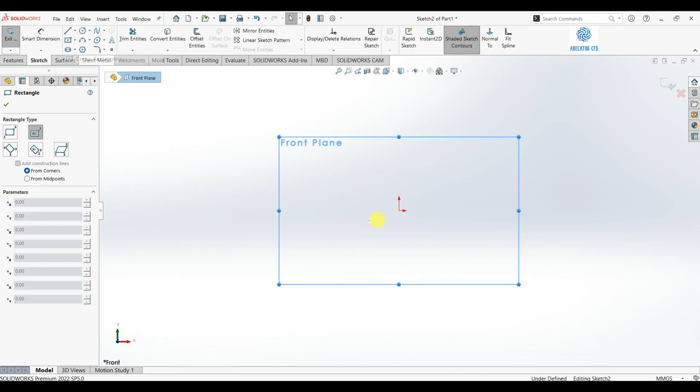In Extruded Boss/Base and many other features, you will find the thin feature option. Let's sketch a quick shape so you can see how it works.

When you enable thin feature, SolidWorks creates a hollow body with wall thickness. Right now the ends are open, so there are no caps on either side.

Here you set the wall thickness, then click OK. Now you get a hollow shape like this.

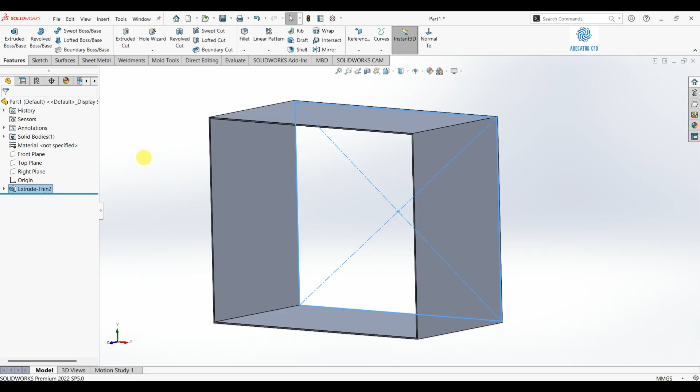And you can adjust the thickness anytime, for example, to 3 millimeters. If you enable cap ends, SolidWorks closes both ends with caps.

Here you can control the cap thickness too. Click OK.

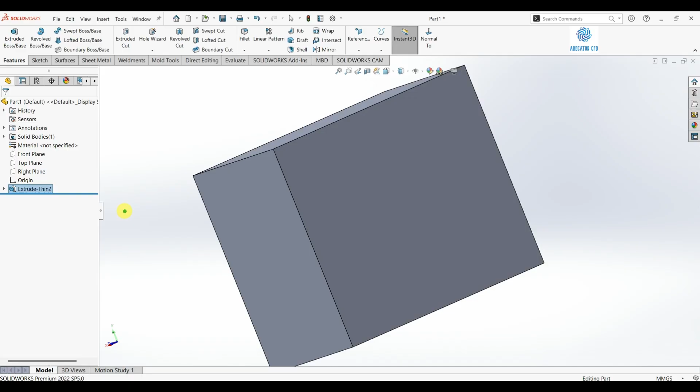Now the ends are closed, but the body is still hollow inside. Let's take a section view. You can clearly see the hollow interior.

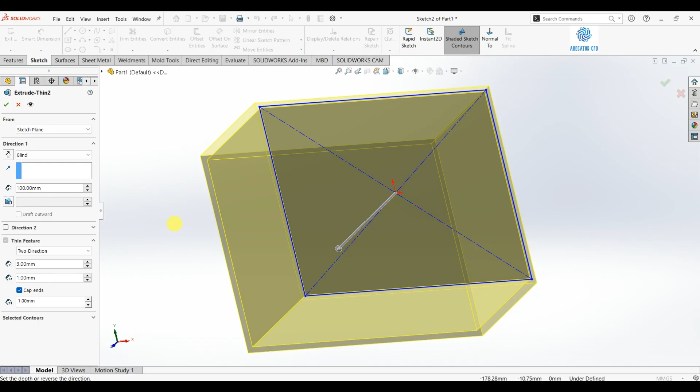There are also other end conditions, like one direction, mid-plane, and two direction. So you can add thickness on one side or on both sides.

There are more options here too. Alright, that was the thin feature tip.

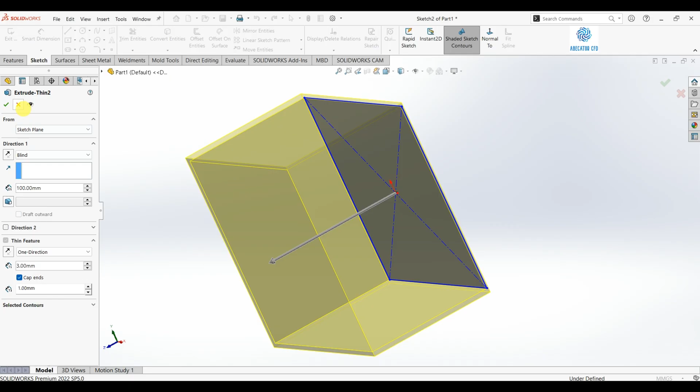There is another option called Select Contours, and we will use it in the exercise in a moment. So let's delete this and start the exercise.

Here is the exercise we will model. You can see the isometric view, and you also have the front, top, and right views. Let's build it together.

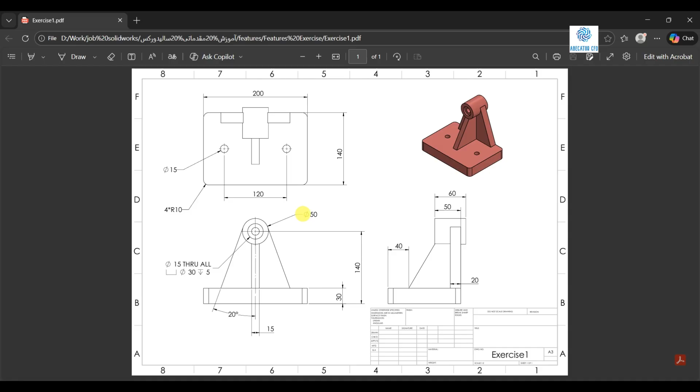We start with the base. All dimensions are given. Start a sketch on the top plane.

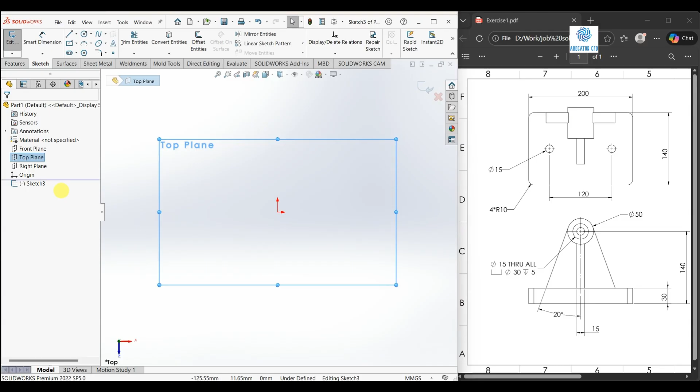I'll zoom in a bit so we can see better. Create a rectangle, using center rectangle.

Set it to 200 by 140 millimeters. These corners have fillets with a 10 millimeter radius.

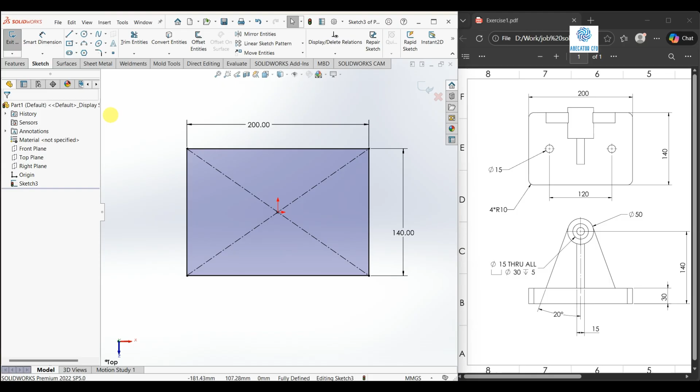You can add fillets in the sketch or later in features. We will extrude first, then add the fillets and features.

The thickness is 30 millimeters. Extrude the base to 30 millimeters.

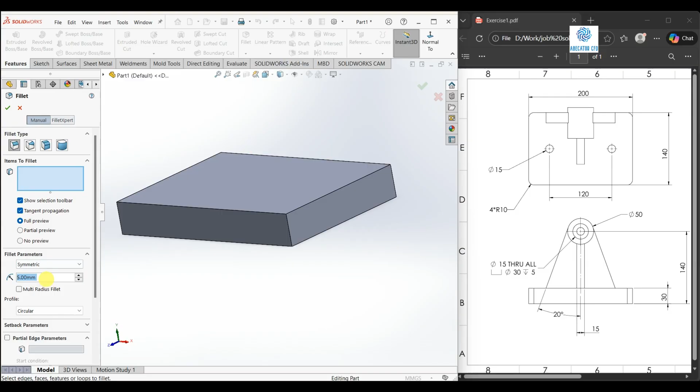Now fillet these 4 outer edges. Choose fillet, set the radius to 10 millimeters. Select these edges.

After you pick a couple of edges, SolidWorks usually selects the full chain automatically. Click OK, and the fillets are created.

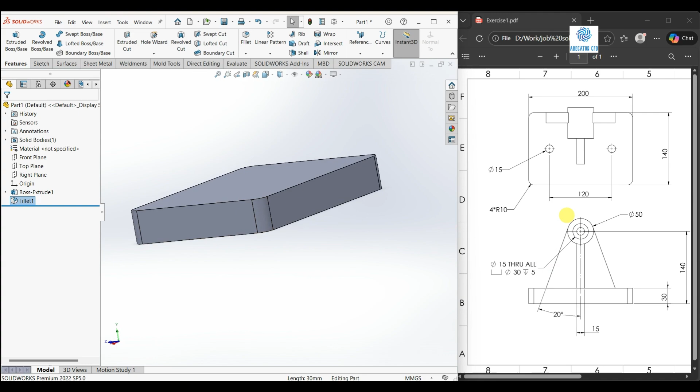Next, on this face, start a new sketch. Draw a circle and set its diameter to 50 millimeters.

Its distance from this side is 140 millimeters. Add that dimension. To fully define it, add a vertical relation from the origin.

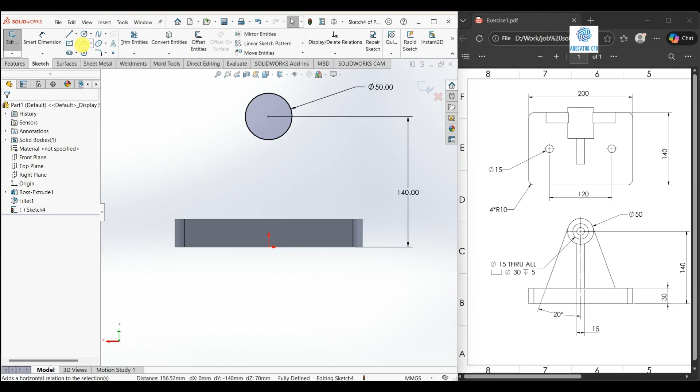Create a center line like this. Now draw a line here.

Make this line tangent to the circle. The tangent relation is added automatically.

Now dimension the angle between this line and the center line. It is 20 degrees, set it to 20 degrees. Now the sketch is fully defined.

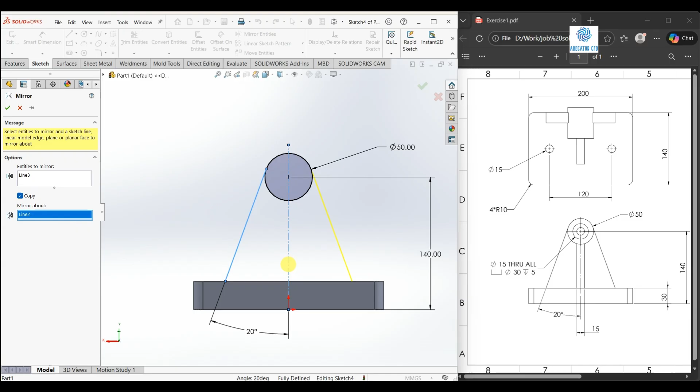Mirror this geometry about the center line. Click OK. But notice, we need a closed contour.

Right now it is open because we are missing this line here. Draw this connecting line as well. Click OK. Now let's check the thicknesses.

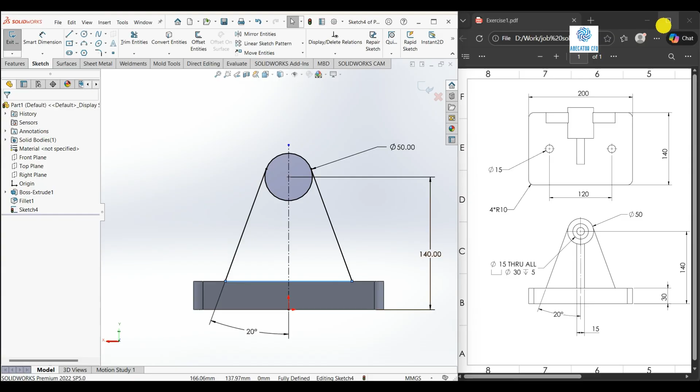This region needs a 20 mm thickness, and this circular boss has a 60 mm thickness. 50 mm is inside the base, and 10 mm sticks out.

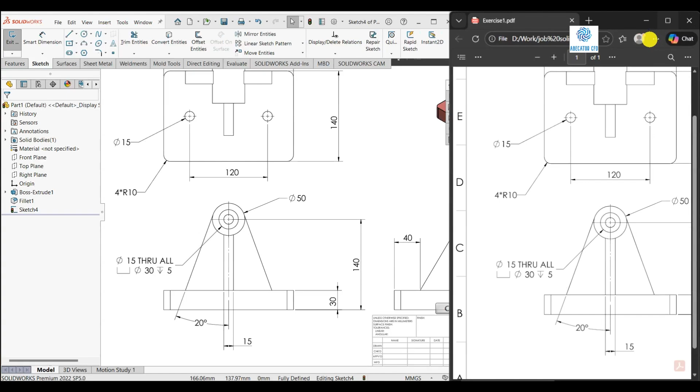Let's build it. This is where Select Contours is important. Select Contours is active now.

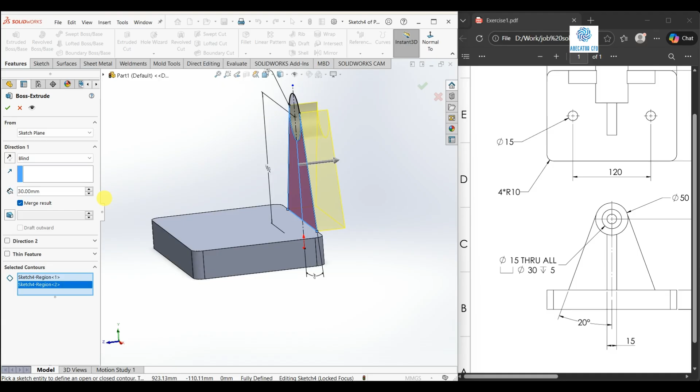This region and the circle do not have the same thickness, so we must extrude them separately. Flip the direction.

Then extrude this contour to 20 mm. Click OK.

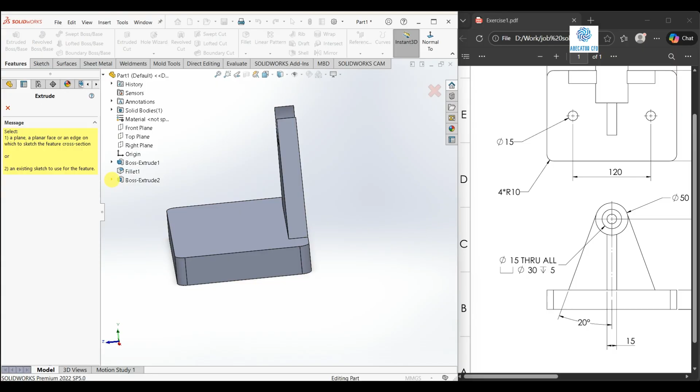Now extrude the circle. Click Extruded Boss/Base again, and click this option to reselect the same sketch.

Under Selected Contours, choose the circle. Let's check the 60 mm again.

50 mm is this part, and 10 mm goes outward. So extrude 50 mm in direction 1.

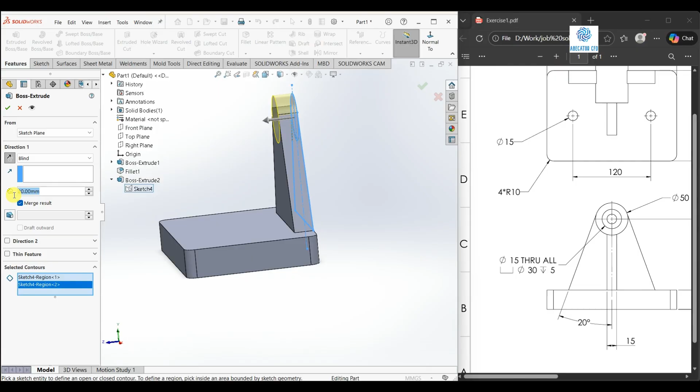Then enable direction 2 for 10 mm outward. Click OK.

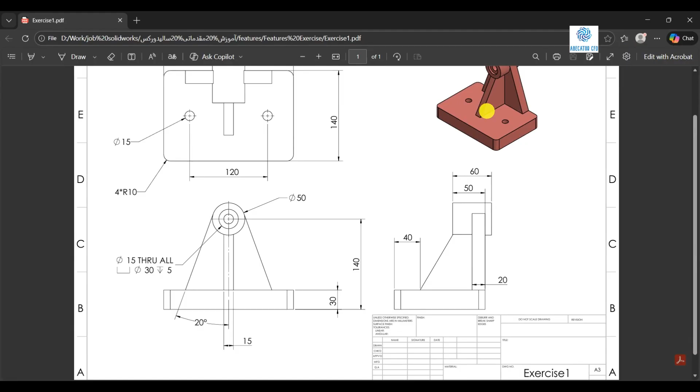Now, as you can see, the part also has a rib. Its thickness is 15 mm, and its offset is 40 mm.

Let's create it. Start a sketch on the plane that passes through the center. That plane is the right plane.

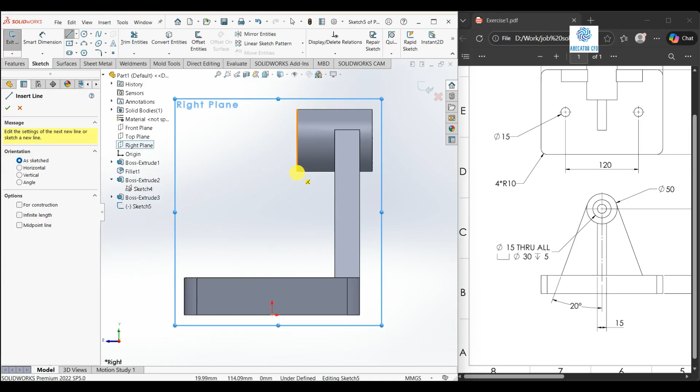Select Line. Draw a line here. Set this distance to 40 mm.

Go to Features, select Rib. Set the thickness to 15 mm. Flip the material side, then click OK.

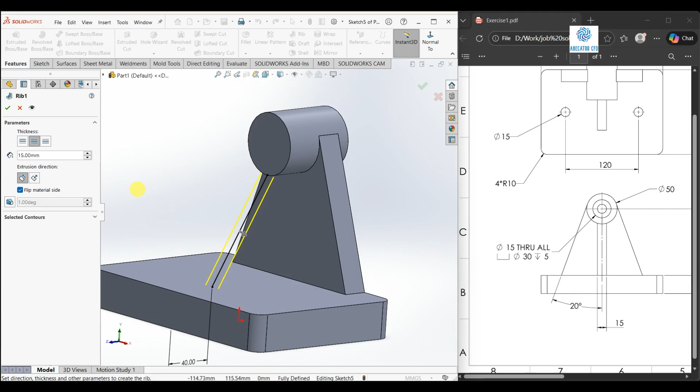Great, the rib is created. Now let's make the 15 mm holes.

Start a sketch here and draw a center line like this. Now draw a circle.

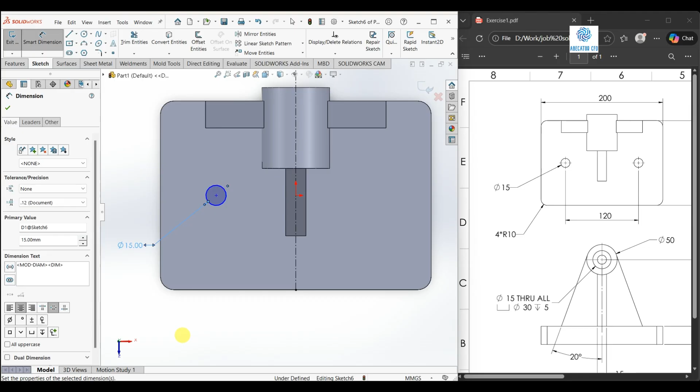Set the diameter to 15 mm. The distance between the two circles is 120 mm.

To fully define it, add a relation to the origin. For example, give it a horizontal relation to the origin.

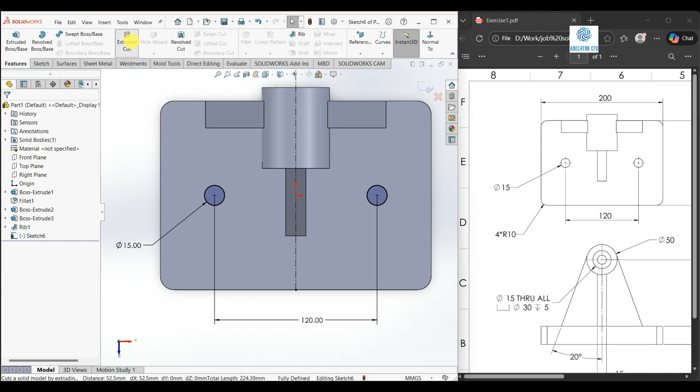Now mirror it about the center line. Then in Features, use Extruded Cut. Choose Through All. Click OK.

Now the holes are done. The exercise is almost complete. Only this last hole remains.

Let's create this hole too. Here the details are given. From the symbol, we know it is a counterbore, so we will create it using Hole Wizard.

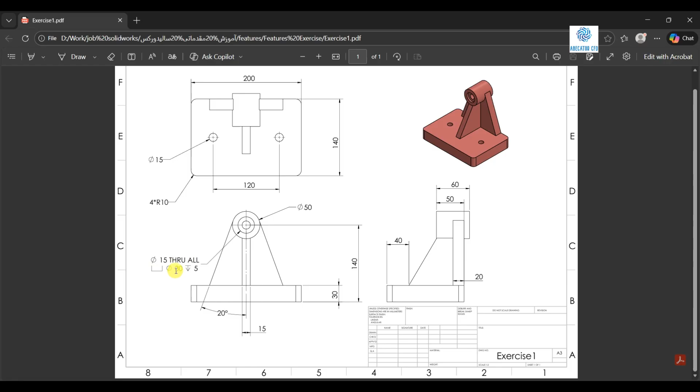Let's check the dimensions together. Select Hole Wizard. Under Type, choose this type here.

Choose Counterbore, now enter the values. The main hole is 15 millimeters, and it is through all.

So enter 15 here. Now set the counterbore diameter.

Set it to 30 millimeters. And the counterbore depth is 5 millimeters.

So set the depth to 5 millimeters. Keep the hole end condition as through all. Then go to Positions, select this face.

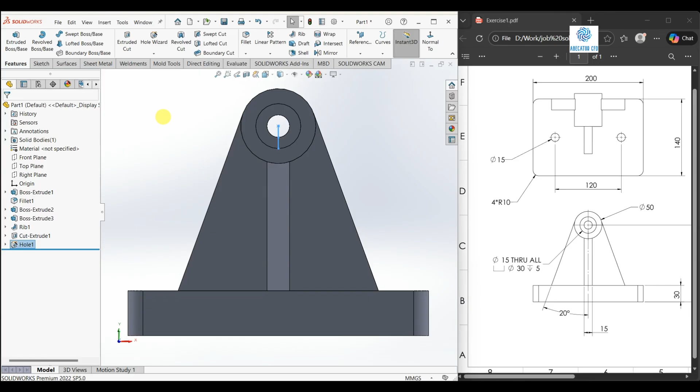Then click the center point here. Click OK, and the counterbore hole is created.

Great, we completed the model. Now let's give it a color too.

In the Appearance tab, choose a color you like. Then our exercise is complete.